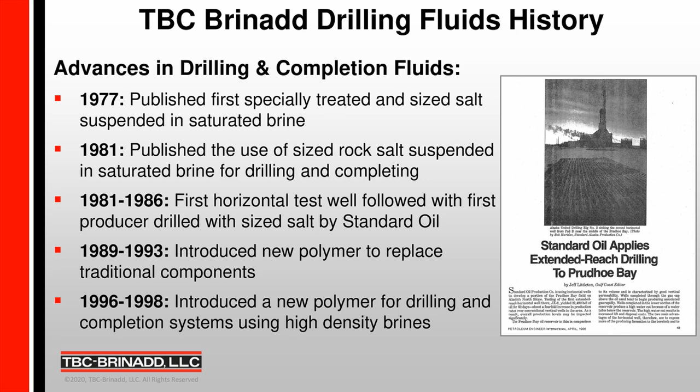In the early 90s, a new polymer, FL7+, was introduced to address limitations like temperature stability of the conventional components in the original salt completion fluids. FL7+ continues to be a very effective fluid loss additive to this day. TBC-Brinadd continued to develop with new systems and additives that would perform in high-density brines while maintaining low solids concentrations. Our complete line of systems and additives are listed on the next slide.

In addition to our specialty additives, which cover a wide range of functions in our lost circulation systems, we offer the complete drilling systems. Each have been used worldwide. The systems shown in red are the topic for today. We will go over Di-Drill, Thixsal-Ultra, Ultra-Mag, and Ultra-PF.

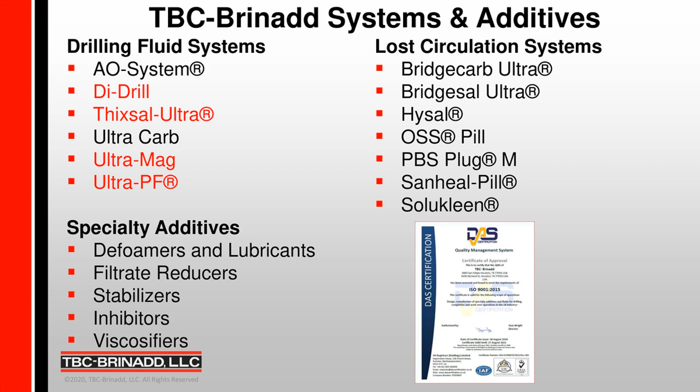This slide gives you an overview of the applications and features for the 4 systems. From top to bottom on the first column, you'll see that the base fluid type ranges from divalent to monovalent to formate. Quick differences between each system. Di-Drill utilizes no biopolymer gum. Instead, this system generates low-end viscosity due to the synergistic combination of starch and buffer. This unique characteristic allows for engineering ECD.

Our Thixsal-Ultra system is for use with all monovalent brines and utilizes sized calcium carbonate or sodium chloride as bridging agents. Our Ultra-Mag system incorporates an alternative bridging agent with a specific gravity of approximately 3.56. We offer a wide range of magnesium oxide bridging grades. These grades with this specific gravity can reduce total bridging concentration. This reduction allows total solids loading by 21 to 27 weight per weight, which helps reduce ECDs.

Our Ultra-PF system was developed for use in formate brines. This system has enhanced LSRV and mitigates gelation in the formate brines due to the synergism between the starch and xanthan. All of these basic systems are effective in the environments listed above. However, with the introduction of specialty additives, these 4 systems can achieve an environment not checked, such as thermal stability. All systems can be used to build fluid loss pills, workover systems, liner runner systems, and injector systems where direct injection and mitigation of channeling occurs.

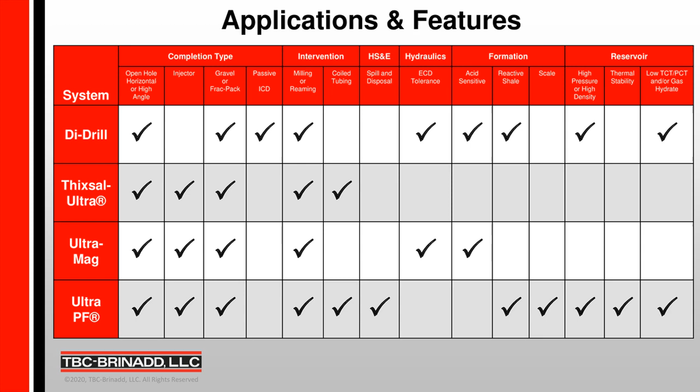Now, looking at how our systems differentiate in technology, each use a unique fluid loss control additive. We'll discuss first the Di-Drill system. TBCX600 is the starch of choice, highly branched. The molecular weight is similar to xanthan. It's cross-linked to reinforce thermal stability and shear. Pre-gelatinized to provide dual functions such as viscosity and fluid loss control.

Our Thixsal system incorporates FL7+, which is cross-linked to reinforce thermal stability and shear. It's hydroxypropylated for resistance to biodegradation, which improves storage stability and increases solubility, which allows it to hydrate in near saturated, even saturated brines. Our Ultra-Mag system utilizes Broma FLA. It is a corn starch derivatized, partially depolymerized non-ionic to mitigate the effect of gelation from magnesium oxide. It's only partially cross-linked for thermal and shear stability.

Our Ultra-PF system incorporates Formatrol. It is a cross-linked derivatized starch to effectively function with xanthan gum and formate brines. Each starch undergoes a unique QC process to validate every lot to ensure we are giving the quality product performance needed.

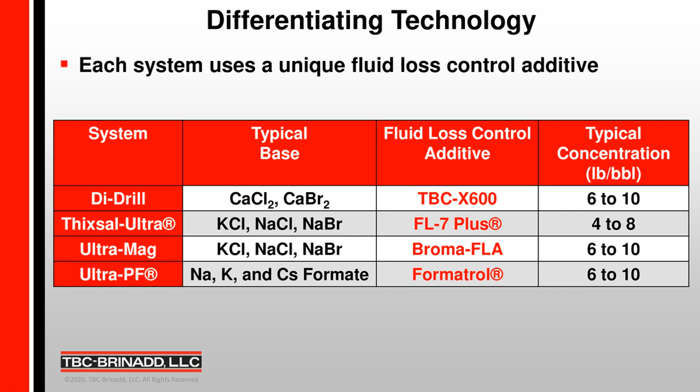Now let's look at two of our systems further with the starch evaluation in each of these two systems. The first one we'll talk about is Di-Drill. In Di-Drill, the first, above table you will look at is showing the impact of a buffer on low shear rate viscosity to 3 different starch derivatives in a 14.5 pound per gallon calcium bromide.

Evaluation was done with and without a buffer. The buffer concentration is a 1/4 pound per barrel. TBC-X 600 incorporated with or without a buffer does provide low shear rate viscosity and is stable over aging and shows no settling or separation despite the other 2 starches that either have total separation or gelation.

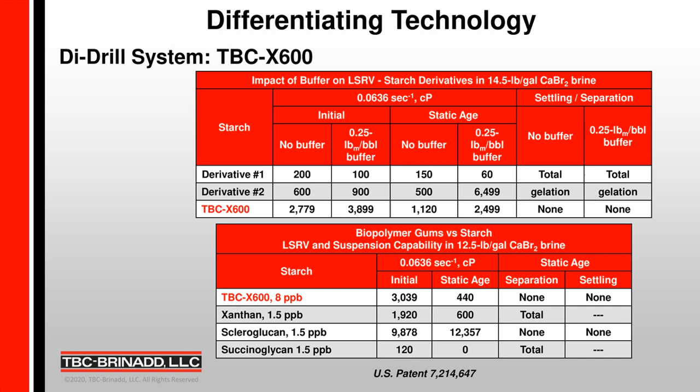As mentioned, Di-Drill is a biopolymer-free system. Based on that, we did an evaluation with 3 different gums, looking at the yield, performance, and a 12.5 pound per gallon calcium bromide, focusing on do we have yield up front and do we have no separation or settling after aging. TBC-X 600 does perform with initial yield up front and maintains no separation or settling.

The next system related to Ultra-PF system and the Formatrol additive. The upper table we looked at a 12 pound potassium formate base brine with 22 pounds per barrel to differentiate performance of the starches, thus the ability to measure before as well as after. We are looking for yield of the polymer initially with nominal change after aging.

Starch derivatives 1 through 4 have no yield up front, and it took time and temperature to achieve viscosity. PAC did provide yield up front, but temperature impacted the viscosity after dynamic aging. Formatrol proved and provided yield initially and maintained viscosity.

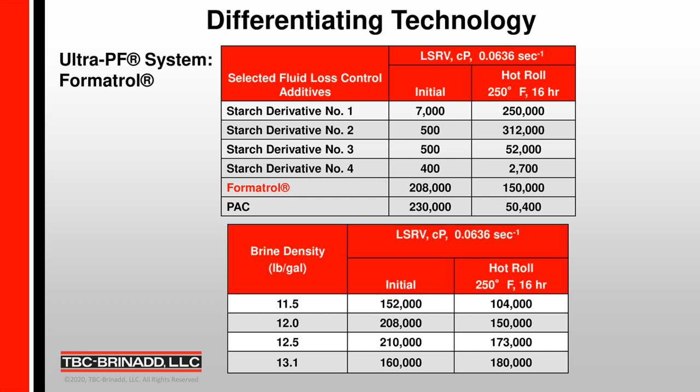The lower table, we were looking at the yield performance of Formatrol in various base formate brines, starting from an 11.5 going to saturated 13.1. Again, confirming that we have viscosity up front without gelation and very nominal change after hot rolling at 250 degrees for 16 hours. Next, Mark will be discussing each system further on their field performance and additional lab.

Thanks, Kim. These next slides hopefully will provide you some more detail about the 4 systems. First is our Di-Drill system. This system generates the low-end viscosity without biopolymer gums, as Kim demonstrated previously, but more importantly, it mitigates gelation. It's cement tolerant. There's no treatment required. Thus, you can use it to drill out after cementing a liner or a string and continue drilling through the pay zone.

Low field maintenance is only 3 products typically required: the starch, TBC-X 601, which is the buffer, which generates viscosity, and the calcium carbonate bridging grades. As shown in the table, density is achieved with the divalent-based brines, typically 10.3 to 10.5 up to 16 pounds per gallon. This promotes flexibility and yields same performance in low or high density brines. It's temperature stable to approximately 260 to 265.

It provides the ability to formulate liner running systems as well as systems for workover, even recompletions. It's conducive for initial well cleanup. So you have the ability to engineer for completions such as passive ICDs, where pumping a breaker is limited. Due to the density of the base brine, which reduces total solids, in the absence of the biopolymer gum, these impart the ability to engineer the ECD for drilling narrow windows.

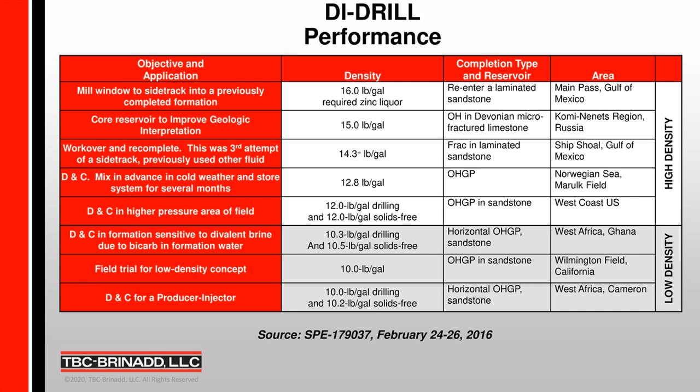The following is an example using data collected from a horizontal well. So this well was drilled with a 13-pound per gallon Di-Drill system, used 35 pounds per barrel of bridging solids. The ECD target was 13.8. That was a less than 0.8 pound per gallon optimum with a 0.9 pound per gallon maximum allowed. So we drilled an 8.5-inch wellbore starting at approximately 16,480 feet to TD, and it was to remain within a 50 to 55-foot window through a Miocene target sand.

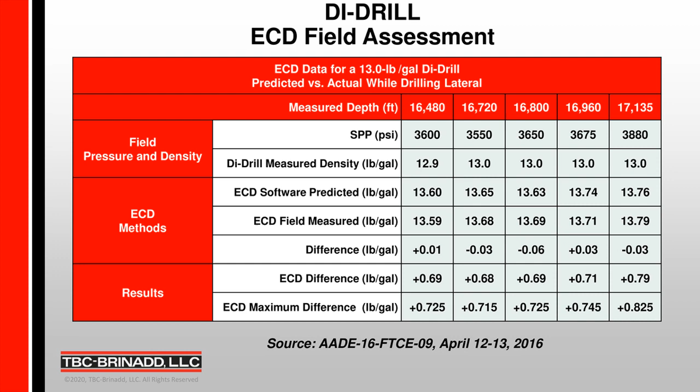Next is our Thixsal-Ultra system. This system can be formulated up to densities of approximately 13.5 pounds per gallon. It's temperature stable to approximately 250 to 260 and up to 300 with stabilizers. As Kim indicated previously, this uses the cross-linked hydroxypropylated starch, and this imparts solubility and fluid loss control even in saturated brines. With the addition of xanthan, as shown in this table, this system is typically moderate to highly inverted and exhibits nil gelation with elevated LSRV.

The images show examples of filter cakes from a saturated system that used 46 pounds per barrel of salt. These are shown after a PPT with 5,000 PSI differential on a natural sand disk. The filtrate total after 30 minutes approximated 9.5 mils. The ability of the FL7 Plus to function in this saturated brine contributes in part to the relatively low fluid loss, thus the thin filter cake you see in these images.

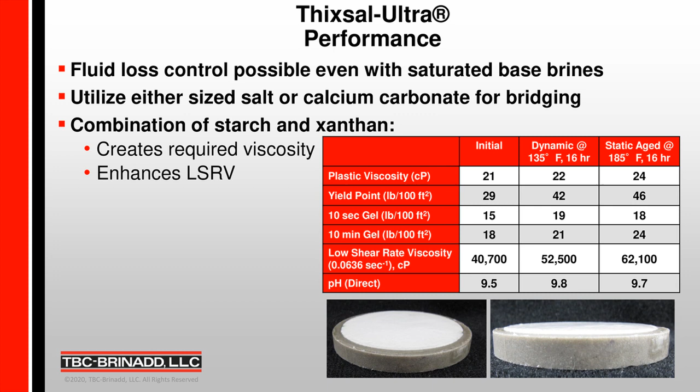The Thixsal-Ultra system uses a myriad of bridging grades that we can supply. The table shows the diversity of these grades. First, the salt and halite grades are available as evaporate or rock salt. Thus, Ultrasal E for evaporate, R for rock salt. The difference is their purity: 99.9% for the evaporate, 92 to 96% for rock salt.

The Plug-Sal grades, also a rock type, function as bridging agents for drilling or fluid loss control pills. And last, we offer a series of calcium carbonate grades with purity approximately 96% or greater. As a note, TBC can grind any of these materials to a specific spec as well as coat to mitigate caking.

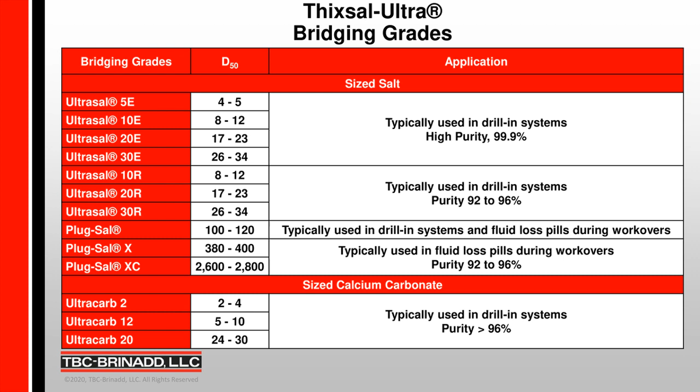Next is our Ultramag system. The difference is the specific gravity of magnesium oxide versus calcium carbonate, where the magnesium oxide is the bridging agent. This yields as great as 27% by weight reduction. This difference can fill the gaps with the liquor brines that are used as the base to achieve a higher density.

So the Ultramag grades are unique as a bridging agent in that they are sparingly soluble in water and aqueous systems. Thus, they're non-reactive in concentrated brine. They provide dual function as a pH stabilizer and a bridging agent. In most systems environment, no buffer is required. These systems function from approximately pH 9.5 to 11.

Magnesium oxide is soluble in acidic solutions, as is well known. However, it's compatible and degradable with breakers comprised of oxidizers, acid precursors, or chelates, as well as partially soluble in ammonium salts. These breakers do not impart secondary reactions that may cause damage. The image shows residual filter cakes that are nearly completely removed by these chemistries.

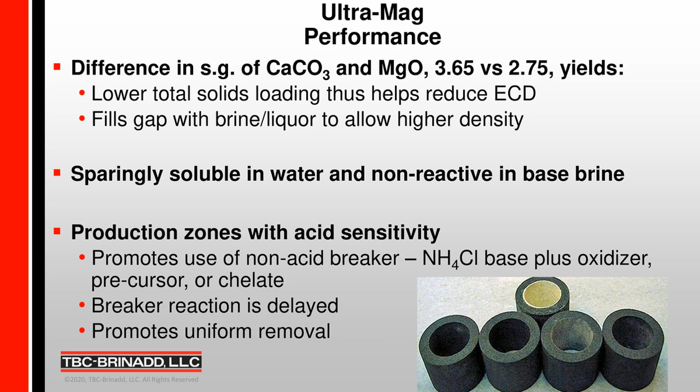This system can achieve densities up to 13.5 pounds per gallon with sodium chloride, sodium bromide base brines, and combinations thereof. No divalent brine is typically used, as there is in part some gelation. However, these systems are stable to approximately 275 degrees Fahrenheit. The primary components comprise standard biopolymer gum, the Broma FLA starch for filtration control, and the sized magnesium oxide for bridging.

This shows the bridging grades that we currently utilize. There are 7 grades available. I show them as 3 textural classifications: very fine, fine, and medium. This range provides effective bridging over a wide range of permeability as well as fractures. For example, a 4-Darcy formation would equate to medium pores of approximately 62 to 64 microns, whereby the bridging blend is easily optimized with the PSDs shown.

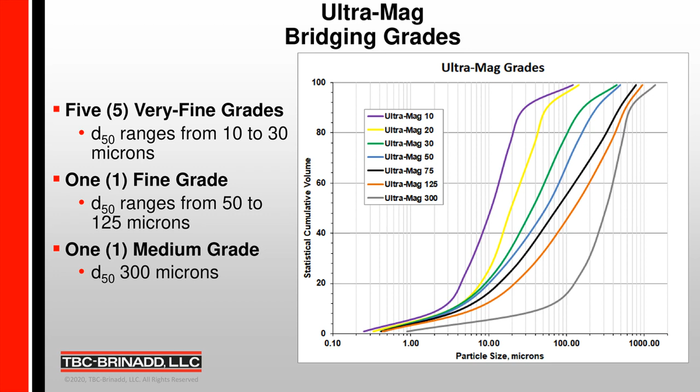On the Mohs hardness scale, magnesium oxide is approximately 5.5. These grades typically exhibit a purity of greater than 98%. The impurities are calcium and silica oxide, approximately 1 to 1.5%. These grades are calcined, and this retards their reaction activity. As such, they function as a bridging agent versus a buffer.

The next system is our UltraPF. As known in the oil field, formates provide a relatively wide density range, even up to 20 pounds per gallon, and temperature stability to 330, 360 with stabilizers. From the second and third bullets, Formatrol starch, that Kim mentioned earlier, provides synergy and stability at the low ends. It enhances the LSRV and provides low fluid loss.

The images show a 12.5 pound per gallon system that used 35 pound per barrel of calcium carbonate, 8 pound per barrel of Formatrol, and 3/4 pound of xanthan. These were deposited at 250, and the low fluid loss control yields relatively thin filter cakes as exhibited by both a Fann 90 and an HTHP test. So formates are also known as inherently shale stabilizing brines.

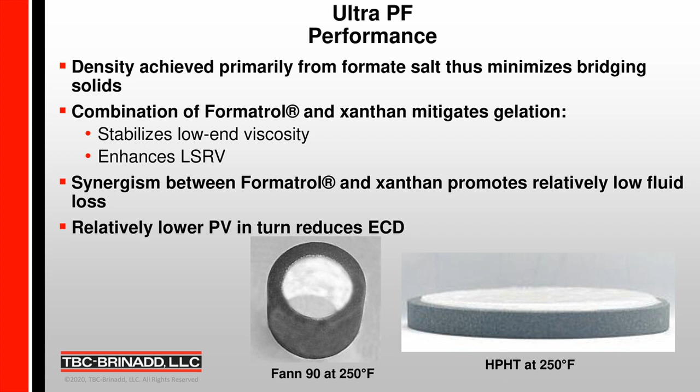In the next slide, here's a small example that shows the results after dynamic aging systems for 16 hours at 150, where they're exposed to Pierre shale discs. These systems utilize 10 pound per barrel of Formatrol and 0.5 pound per barrel of xanthan. The reference for this type of test is oil-based mud, typically 99 to 100% SSI, thus the greater than 90% target. Note that high-density formates, such as 13.7, most likely never require an inhibitor, while lower-density systems may require one due to the increased water.

The rheology table for the UltraPF system shown in this is a 13.6 pound per gallon system. This included 1% drill solids. They were dynamic aged for 180. This shows the UltraPF system for 5 and 7 pound per barrel of Formatrol, and both used a 0.5 pound per barrel of xanthan. The reference in the last 2 columns shows 6 and 7.5 pound per barrel of a cross-linked starch and 0.6 and 1.5 pound per barrel xanthan.

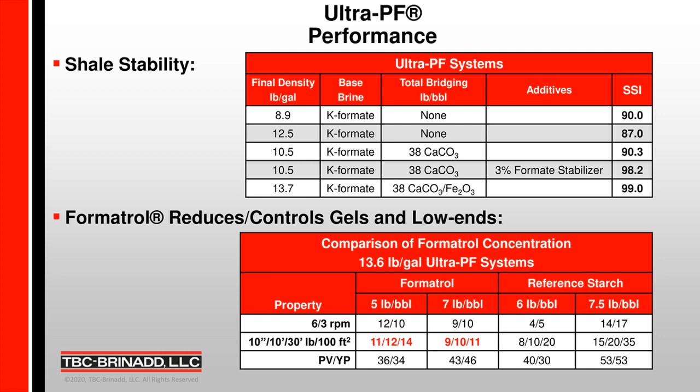Note the gels highlighted in red. You can see that they're all nearly flat for the UltraPF system, but they're increasing for the cross-linked starch. Also note that even when decreasing the xanthan, such as the 6 pound per barrel, while the gelation is reduced, the system is no longer inverted and the 6 and 3 RPMs are reduced.

Next, I'd like to show you 2 examples of return perm, and we selected an open hole gravel pack and a direct injector. We selected these 2 examples as arguably they are the more difficult to clean up before execution in the field. So both of these return perm examples utilize our Thixsal-Ultra system.

This Thixsal-Ultra system included 0.5 pound per barrel of UltraBreak M, which is our internal breaker. The system was designed inverted such that the PV/YP is almost 3-to-1. However, the 10-second, 10-minute gels are 20 and 21, thus nil gelation.

So to simulate cleanup of an open hole gravel pack, we used a 20/40 gravel and a coupon of a premium sand control screen, and these were incorporated after the mud off on a formation sand pack. So first, the initial perm was established with 3% KCl. It was done for the pack as well as the screen.

Next, there's a dynamic mud off performed for 8 hours as 4 hours dynamic, 4 hours static at 226 and 240. And 1,000 PSI system pressure was applied for both. This yielded 9 mils, where 160 mils was established as the maximum allowable. Then we applied the gravel in the screen and pumped the breaker.